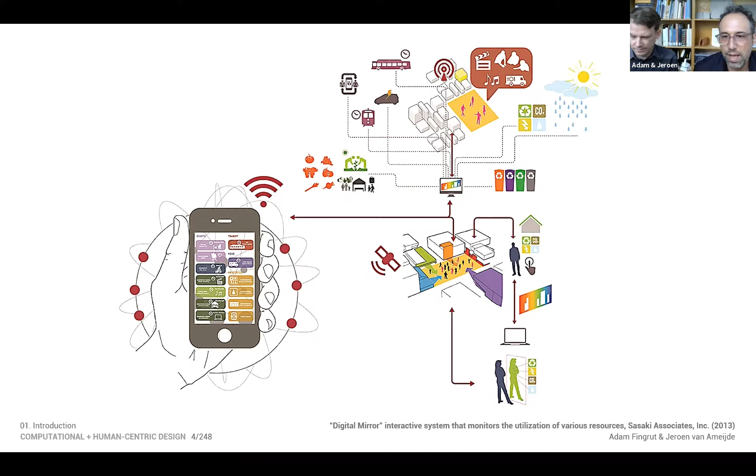Okay. So the evolution of cellular phones since the 1970s shows how new technologies have often had the capacity to not just upgrade existing processes, but to revolutionize many aspects of our daily lives. We now have multifunctional platforms through which we communicate with the world, engaging with our ever-increasing range of data sources embedded within our environments.

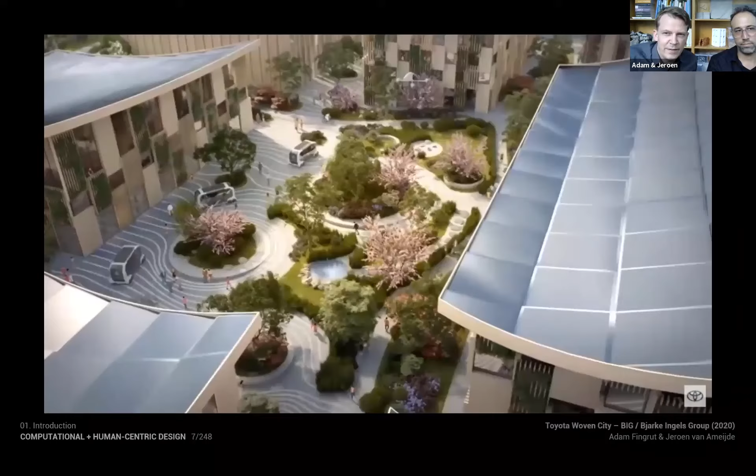These increasingly sophisticated technologies permeating buildings and cities offer exciting new opportunities for us to rethink how we can shape future environments around the living patterns of individuals and communities. Instead of the previous visions of future cities, which were filled with hyper buildings and flying cars, the cities of the future may actually look more familiar, but in reality are also more radical than what science fiction had predicted, seamlessly merging our physical and digital environments through the embedding of digital and robotic devices in and around the home, enhancing all types of logistics, play, and human interaction.

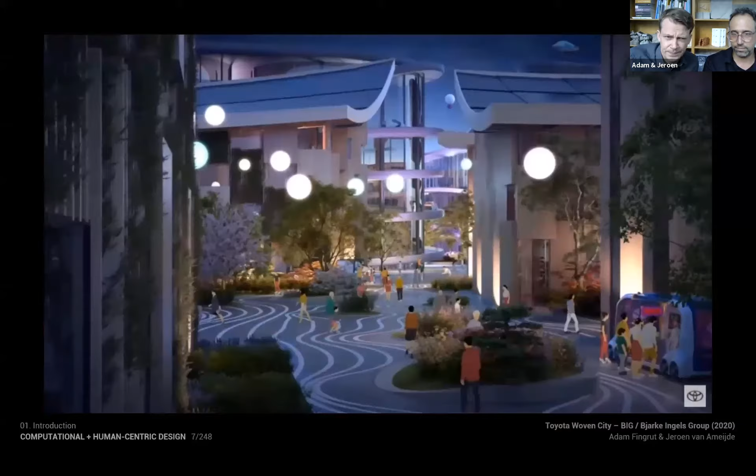Buildings becoming embedded with sensing and actuating systems that respond to individual user requirements in real time, monitoring and analyzing ways to increase efficiency and support productivity in a time when the ways in which we work need to be more flexible than ever.

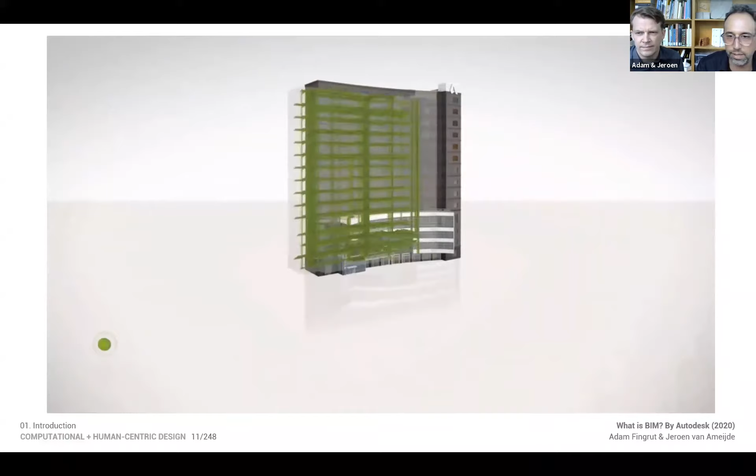So when everything is becoming digital, the role of the architect and urban designer is changing from that of a draftsman of standard solutions to a designer of complex environments that integrate ideas about space, structure, climate, infrastructure, addressing the lifespan and occupancy phase of buildings, and focusing on the design of user processes instead of that of just products.

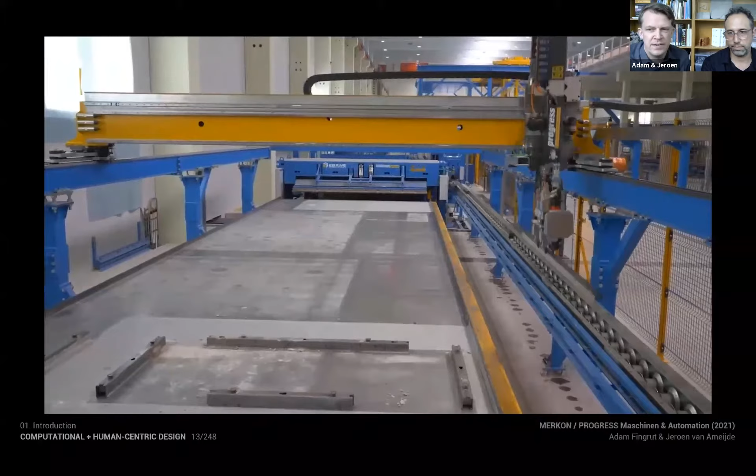New technologies allow us to incorporate a wide range of data, knowledge, and understanding, such as people's perception of space analyzed through computer vision, and allow us to conceive of buildings not as labor-intensive artifacts, but as digitally designed and fabricated kits of parts assembled onto sites using an integrated workflow that seamlessly connects our CAD software to the building information modeling software that controls construction.

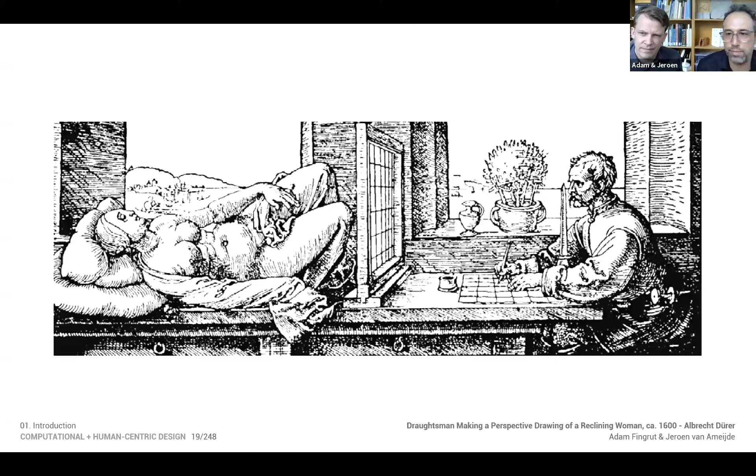Yet as the increasingly sophisticated interface between the digital and physical starts to impact many different aspects of our everyday lives, there is an urgent need to engage with technologies through design thinking, rather than letting developments be driven by engineers, managers, and corporations. Academics and designers are in a unique position to evaluate the tools and methods with which they perceive the world and how they organize and process information, and assess the interface between the analog and the digital world as the most critical aspect, as the feedback loops between the two are the current forefront of innovation.

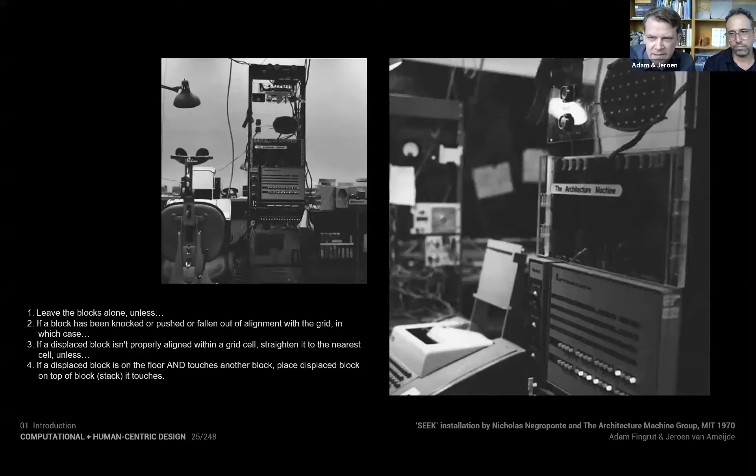Through simple rules that analyze and manipulate the blocks, the system tries to help the inhabitants achieve their ideal 3D environment. And the role of the architect is not to design a fixed outcome, but a process that governs a system of human-centric design. The steps of this system are highly relevant still today, as the scanning and analysis of sites, interpretation and implementation of design interventions are at the basis of all new forms of data-driven design.

Of key importance is the feedback loop between the evaluation of performance and the improvements of future design solutions. As these types of feedback loops are now applied to analysis of complex and big data, we can tap into the real complexities of urban ecologies. Instead of relying solely on the human designer, processes can be enhanced with digital knowledge systems that incorporate the real world needs of end users into designs for the built environment that are better fit for purpose.

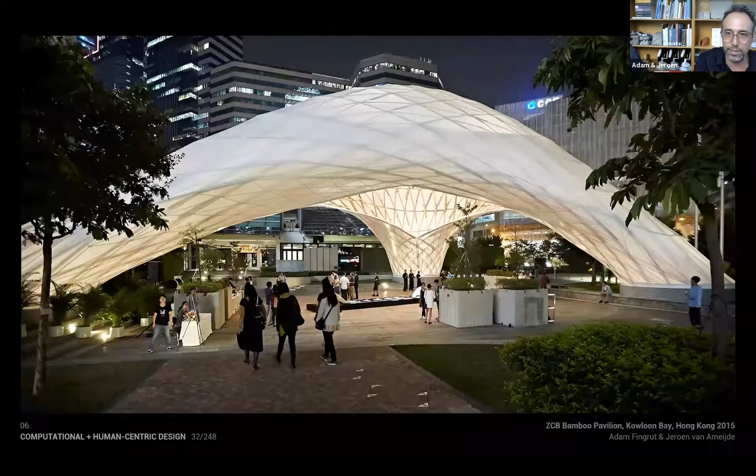My name is Fingrut, and I'm an assistant professor here at CUHK School of Architecture. My background is in computation and design. In particular, I have focused on design complexity approaches to execute mass variation in the built environment, executing construction and material efficiency. I'm co-director of the Center for Robotics in Construction and Architecture, a collaborative research center under T Stone Robotics

Institute here at CUHK, where we conduct collaborative research on mechanical automation and architecture, linking material science, engineering, computational architecture, design, and construction. Also focusing on educating the public through demonstration projects. And we link our research with industry through the development and execution of real-world construction projects. And I'm also involved in the education of computation and automation with our UG and PG students, linking innovative technology with pedagogy and approaches toward design thinking.

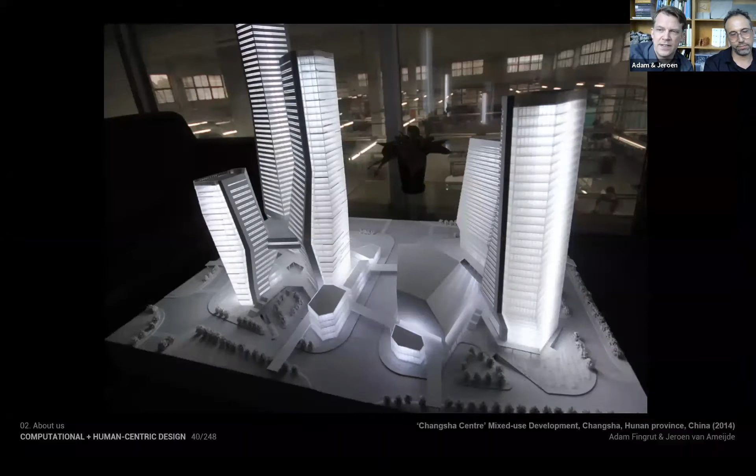Yes, and hello everyone. My name is Jeroen van Ameijde. I'm a new assistant professor since 2.5 years here in CUHK, previously working and living in London. My background is in both academia and practice, teaching part-time and working on projects of various scales since 2002. I've always been interested in the overlap between architecture and urbanism and how buildings shape public spaces and connectivity within their context.

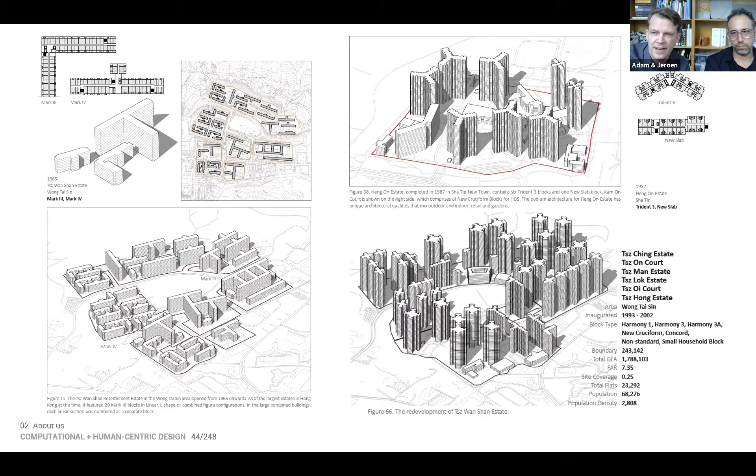And my background also is in designing master plans, which has specifically focused my attention to the design of underlying organizational structures, and how the growth and development of urban areas can be guided by new processes of generative design, and how through the design of, for instance, projects of mass housing, we can develop digital tools that manage non-standard configurations in an affordable way. This has fueled my interest in the standard and non-standard as being used in Hong Kong's public housing and how estate layouts balance between density and livability.

And my current research uses computational analysis of in-between spaces in public housing, which combined with the analysis of people's daily activity patterns, can hopefully lead to evidence-based design guidelines for estate layouts to better support social capital and the sense of community.

So last month, we had the honor to host here at CUHK the 26th International Conference of the Association for Computer-Aided Architectural Design Research in Asia, or CAADRIA. Themed Projections, we invited speakers, roundtable participants, and paper submissions, which would reflect on the different ways in which innovation can impact the quality of future built environments.

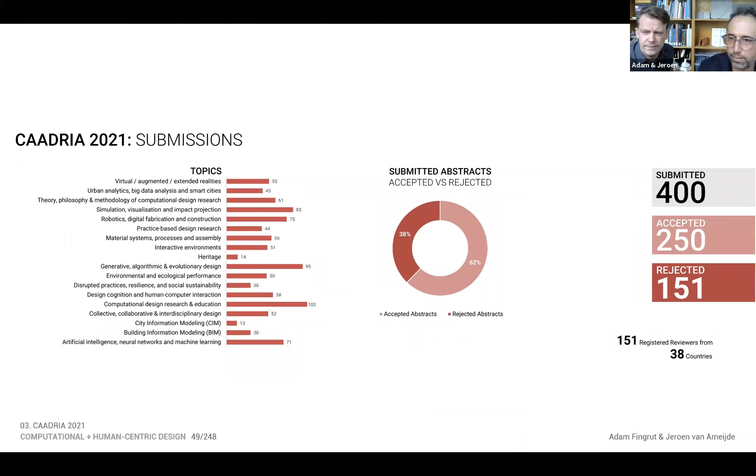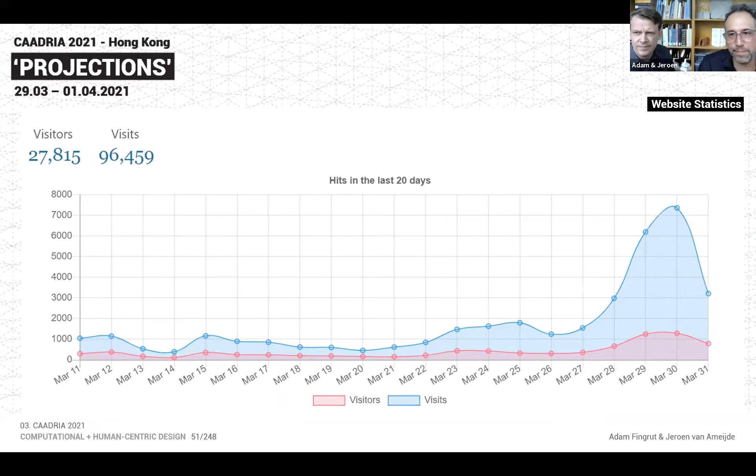The conference annually attracts a large number of papers from all the major universities across Asia and the Pacific region. And since conferences and webinars are now held online, also from many other parts of the world. The CAADRIA website had over 96,000 visits from nearly 28,000 unique visitors. The proceedings, for which we were both editors, include 148 papers on topics ranging from innovative construction to urban analytics, published in 2 volumes of 700 pages each and indexed online.

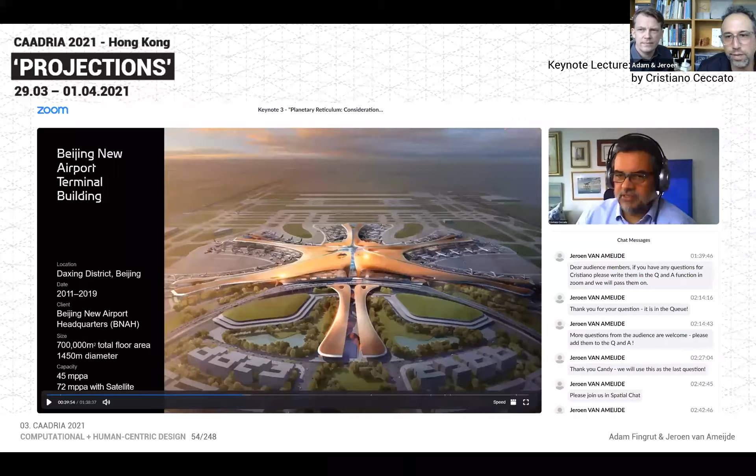Our keynotes and roundtables highlighted the design opportunities and efficiency gains from fully digital workflows, integrating collaborative work from multiple disciplines and stakeholders, with engineering industry specialists noting a shift towards information management services, highlighting the need for international standards for the exchange of complex data sets.

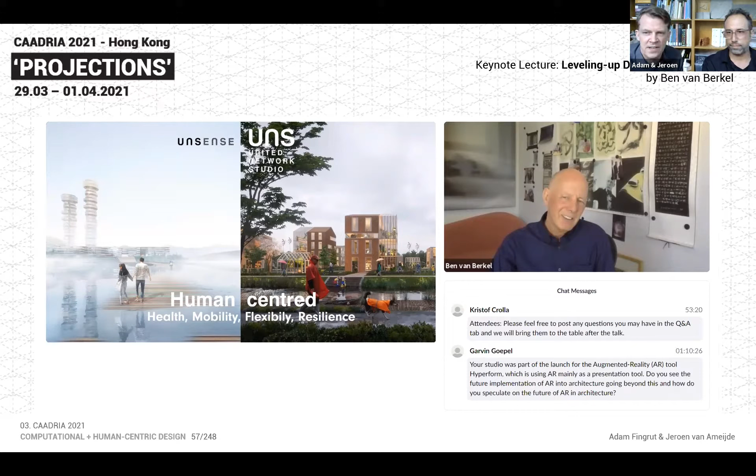And renowned architect Ben van Berkel talked about his new subsidiary company, UNSense, which focuses on artificial intelligence and digital sensor technologies to create human-centric buildings and cities. Several architects, academics, and industry specialists involved in robotics talked about a paradigm shift in the production chain in the housing industry, where a shift from centralized to distributed decision-making could give homeowners more control over the design or adaptation

of their living environments. Professor Carlo Ratti from MIT showed the opportunities that emerge around scanning cities from roads or canals, collecting environmental data to inform policy decisions.

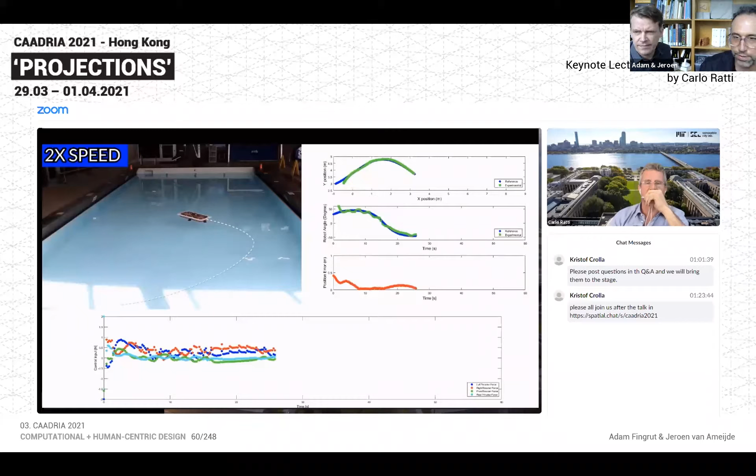As our international panel of urbanists agrees that an urgent rethinking of city planning is needed in relation to a deeper understanding of regional and global ecosystems, which was reinforced by architect and filmmaker Liam Young, who showed a speculative future city for 10 billion people, exploring hyperdensity as the only feasible scenario to balance urban development with planetary health.

For people interested in this research, all the lectures as well as 30 parallel paper sessions will be available online soon. And already now, all the papers with their abstracts, full paper PDF, and 10-minute presentation videos can be accessed on this website.

Okay. In Hong Kong and internationally, the scope of construction projects continues to rapidly grow, creating a shortage of skilled workers to support demand. For example, in 2013, over half of registered construction workers in Hong Kong were over the age of 50. In 2018, the Hong Kong Development Bureau created Construction 2.0 that responded to this need, along with a major upgrade to the industry cross-section.

Under this new agenda, 3 key priorities for quantitative performance improvements were advanced: innovation, professionalism, and revitalization. The Hong Kong Construction Industry Council followed suit with a more detailed breakdown of local industry development, listing building information modeling, BIM as it's known, safety, modular integrated construction, construction productivity, and sustainability.

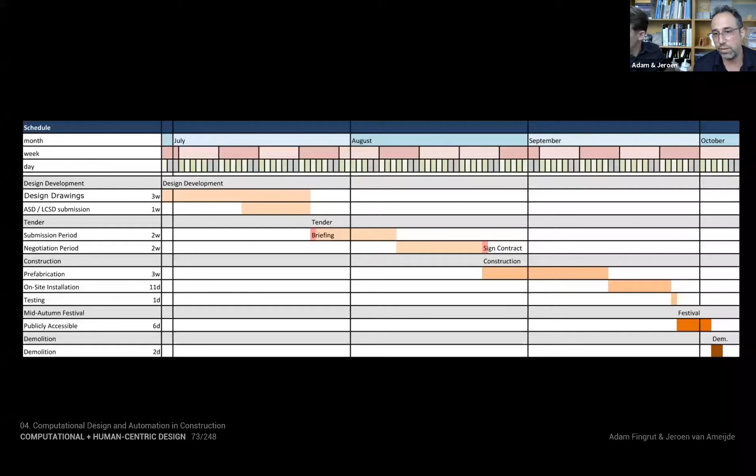After all the conceptual work, this became a real question for the project: how to accomplish geometric complexity, variety, and visual interest in the built environment with low-skilled labor in lightning fast speed. By using the power of mathematics, computation, and digital tools at our disposal, we're able to rethink the geometry and overlay a complex grid atop a generic structural system.

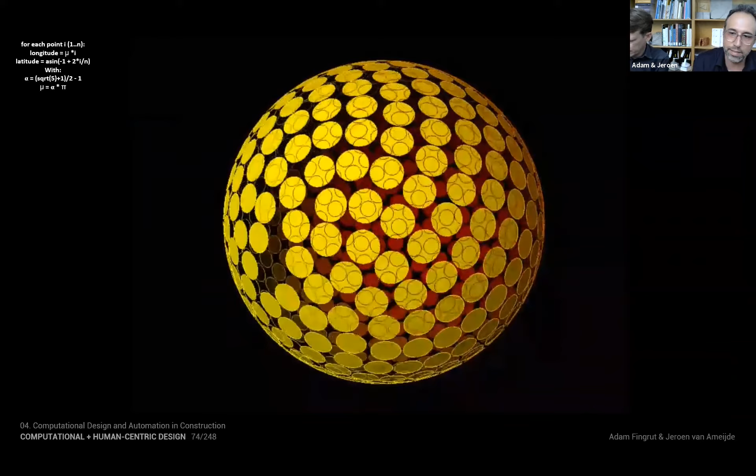Here we're using a method called circle packing, which can calculate the optimum spacing and radius of an area on any given surface. It allowed us to populate our dome in a more complex and dynamic way. The assembly concept was straightforward.

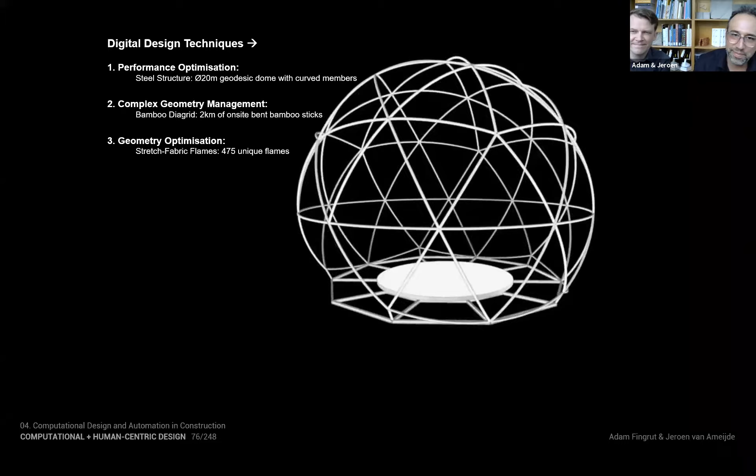Install a heavy steel and concrete base, add a prefabricated dome here, wrap it with bamboo, and finally decorate with 475 unique flames.

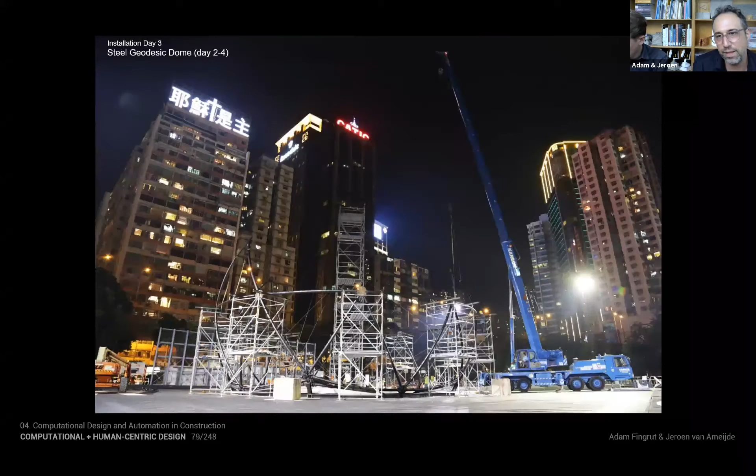Okay. For this to work, notation is everything. It's the conduit between data models and the physical output. And here you see the dome being raised. And bamboo materials were measured and notated based on their intersection points along the sphere, making assembly on the structure straightforward without conventional drawings. And the bamboo diagrid forming over the structure.

And a flexible system using stretch fabric and bamboo was used for each flame or light diffuser. Here we see the first diffusers and LED lights getting installed. Some images of the final construction.

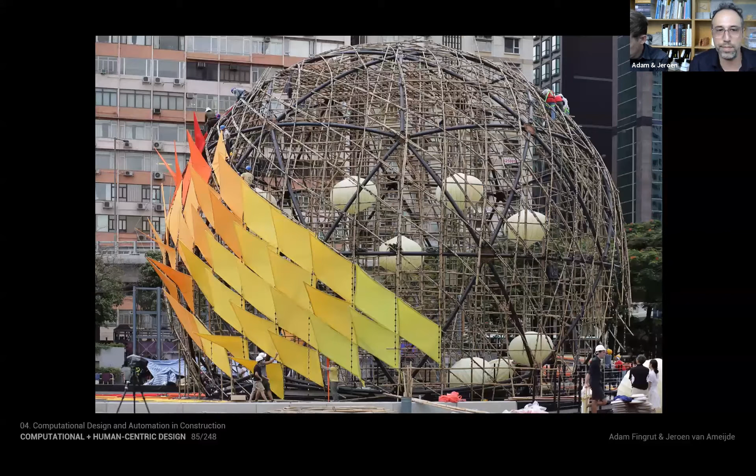And the ZCB Bamboo Pavilion is a 30-meter spanning, lightweight, and bending active grid shell completed in Hong Kong in September 2015 as a public event space. It's built from unprocessed bamboo poles, hand-tied together according to traditional Cantonese bamboo scaffolding craftsmanship, and covered with tensile fabric.

The project is very much a case study for the computational design and building information modeling of structures where both applied materials and available craftsmanship are highly unpredictable in terms of accuracy and precision. It was our goal to narrow that relationship for an accurate outcome.

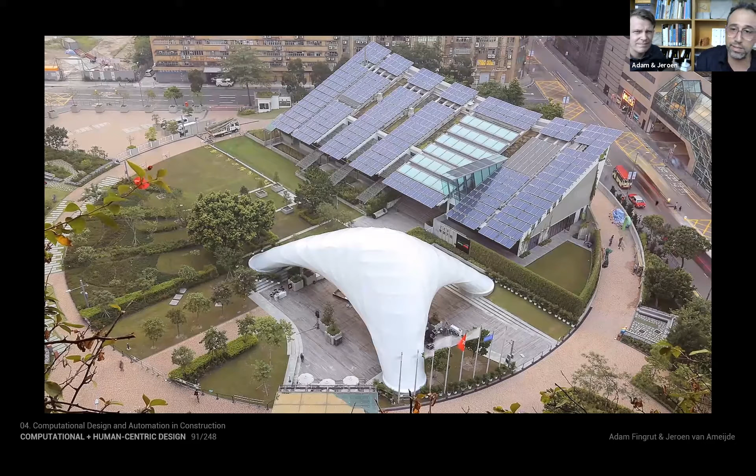You can see how it compares in size to traditional bamboo temporary structures. It uses considerably less material as it capitalizes on the bending strength of the material. The project site in Kowloon Bay near the Mega Box. Extensive use of physical and digital models were needed in a variety of different scales.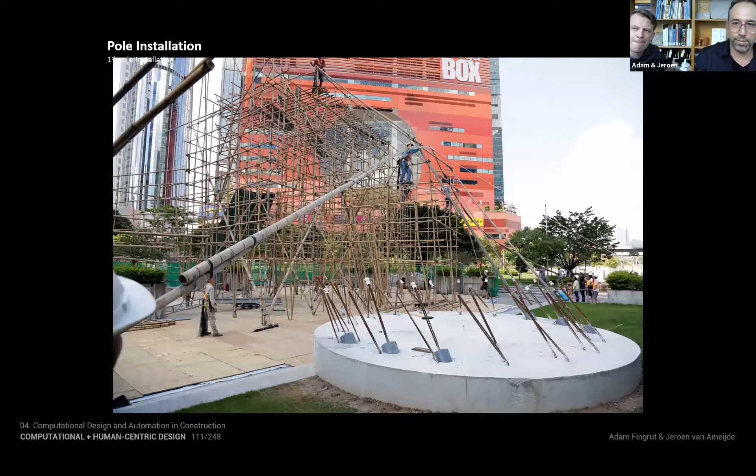And this exact set of drawings was used to lay out bamboo poles on a giant 50-meter long table. And the material was measured according to what was notated, and the cross-connection points were marked off later for reference during assembly. Here you can see the very first pole being installed into place with temporary scaffolding in the background, and fixing to the concrete plinth and footings.

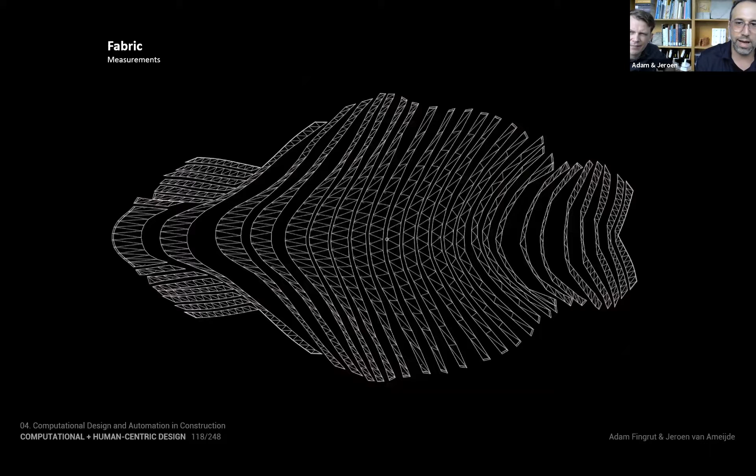910 square meters of fabric were also applied. And workers measured the as-built structure and entered the length data into mobile phones using spreadsheet applications, resulting in unfolded drawings like this that could accurately be applied to the as-built structure. Material was then cut and fabricated in a factory setting using robotic cutters, and heat welded into place based on those digital drawings.

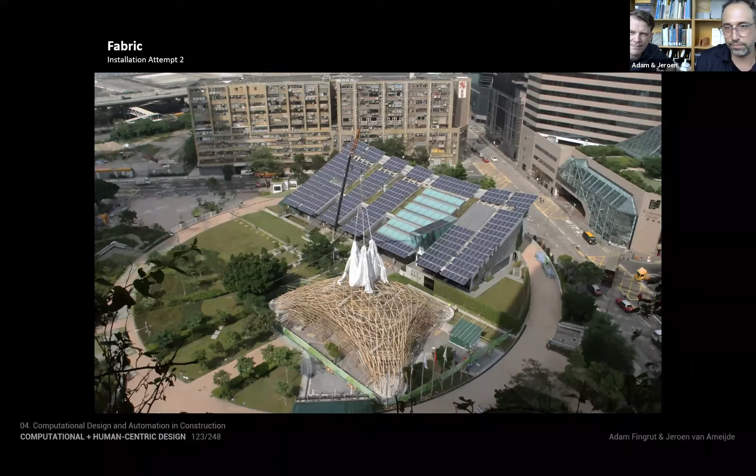Material was then hoisted into place and fastened to the structure in one super tailored surface, and some images of the final result. And of course, we're able to 3D laser scan the entire structure and test for final deviation from design, computer model, and as-built construction.

And a little bit about robotics and what I do with CUHK. This research discusses the assembly of brick structures with a cable-driven parallel robot, explores the impact of computational design tools and the deployment of robotic equipment for the creation of an expanded architectural design space based on the limits of material and equipment in place of a skilled labor force. Bricks and bricklaying have been a part of architecture and our built environment for centuries. And the industry relies on intensive specialist on-site labor.

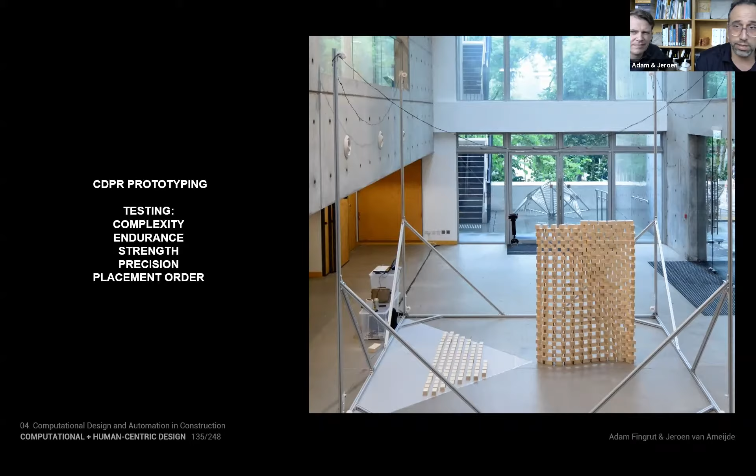Other research has explored the use of long arms, but they're quite heavy or have limited mobility. Our research in the use of cable-driven robotics are lightweight systems that can span over large distances. The setup allows the gripper to reach a large three-dimensional working area in which bricks can be accurately placed. Using input parameters such as guide curves and brick dimensions, brick coordinate information is generated for further processing. So if you think back to our notation, now it's really just a spreadsheet of data transferred to a robotic arm. And geometrically complex spatial structures are possible with undulating walls.

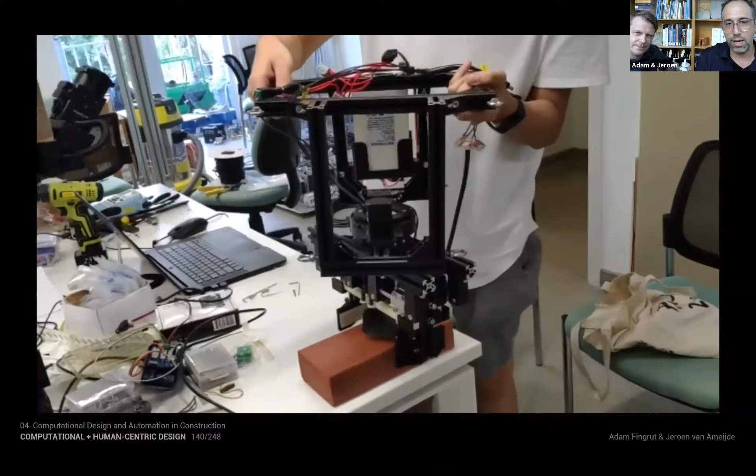This research has been displayed in a variety of industry events, workshops, and museums. And over the years, the system has undergone a number of significant upgrades and advancements in strength, accuracy, and endurance. Automated placement order, stronger gripper motors, stronger cable system, increased precision. On the design programming side, we add intelligent placement order for more stable structures.

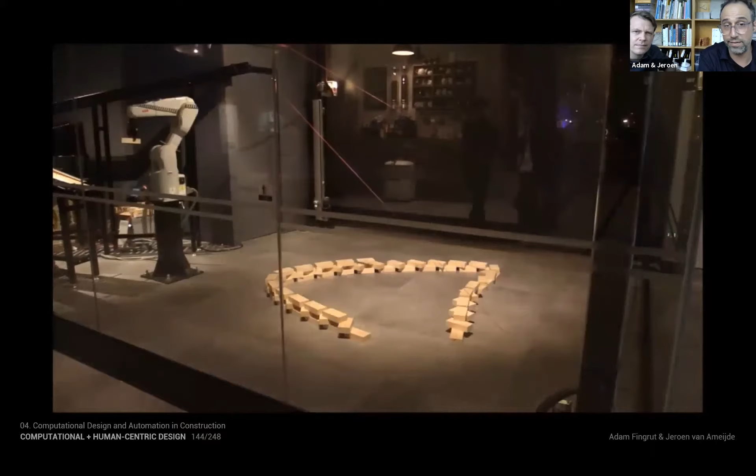We currently have an updated version of the system on display at the Hong Kong Science Museum in TST as part of their exhibition on robotics. This particular system was designed to be on a continuous loop, and we're using lightweight wood for bricks. So here you can see the gripper placing a small, relatively safe structure for display purposes. And I think it's been running for over 3 months or so, with not too many hitches.

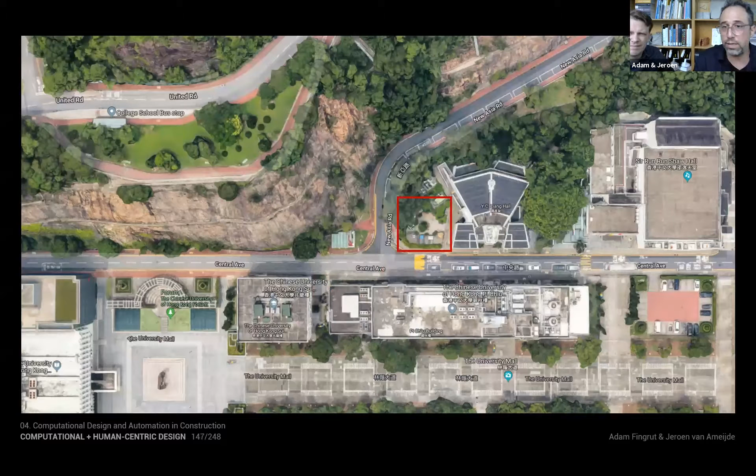And finally, the Yard of Environmental Sustainability project is part of the CUHK Recycling and Sustainable Campus Initiative. This structure, set to be completed this summer, will house a recycling depot for staff and students. The project is also a new space for students and staff to visit and relax, located along the central avenue of our main campus. Here you can see a laser scan of the site with previous designs for recycling bins, clothing, electronics. The space will also include recycling for PVC banners, a free library, etc.

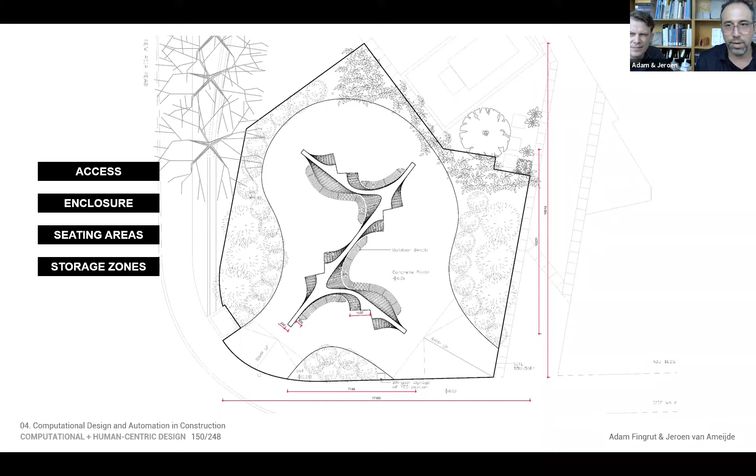The design intends to include accessibility standards, shaded areas, seating. And the project advances our research by placing it into a full-blown construction project with stakeholders, engineers, architects, landscape architects, contractors, building department, and of course, a generous client. And we are on site now, and we are in the final stages of testing before we kick off our final construction.

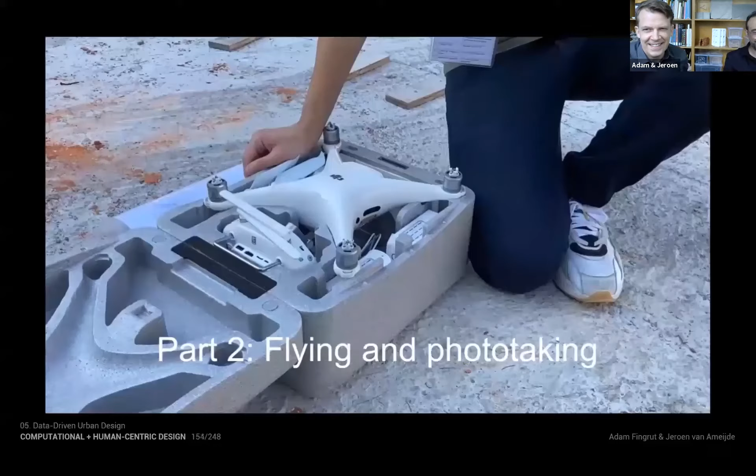Yeah, so Adam and myself have been working on slightly overlapping projects as we have been awarded separate and joint grants by the Hong Kong Construction Innovation Technology Fund, CITF, and the CUHK Teaching Development Grant Program, TDLEG. In this CITF supported research shown in this video, sorry, it was not playing.

We explore the use of drone scanning in the conceptual design stage rather than using this for quality control during construction phases as is often used in industry. The idea is that the highly detailed and accurate site surveys can plug into a more informed and data-driven design process, which is normally based around simplified understanding of the context.

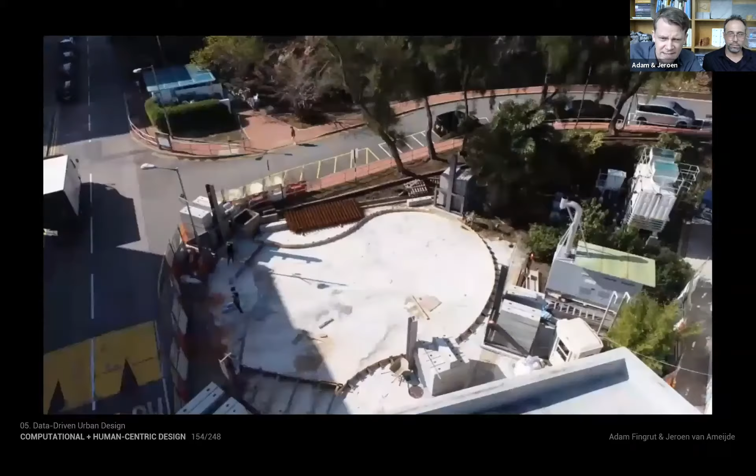Images captured by the drone are transformed into a 3D mesh in the modeling software commonly used by professionals and students in architecture and urban design. This process can be done in stages, even taking photos on foot and adding more detail where needed.

Details such as building alterations, greenery, public space, materiality can be captured and inform a georeferenced and accurately calibrated 3D model, which can be used, for instance, for solar energy analysis to help understand which areas in the public space may be cooler in the summer in relation to the urban form.

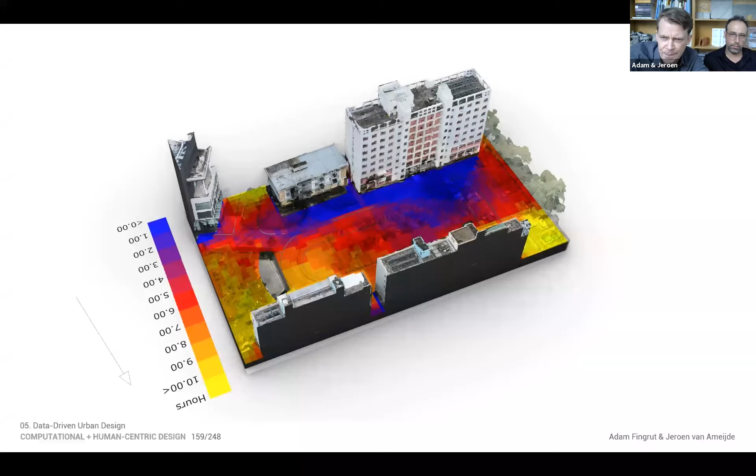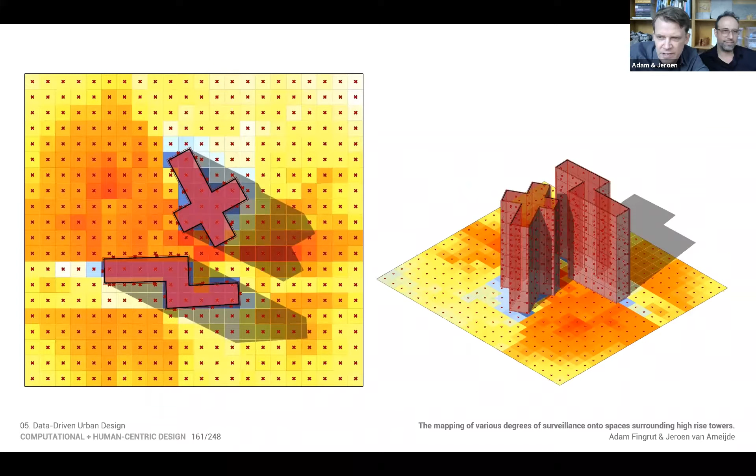We can also perform visibility studies based on the principle of convexity, the blocking of line of sight, which increases the sense of privacy, but may also decrease the sense of safety and orientation in public space. And recent improvements in software and hardware computing now allow these studies to be done in 3 dimensions, visualizing different degrees of surveillance, or what Jane Jacobs famously called eyes on the street.

So in a small test site on the CUHK campus, we can see where the most public spots are and speculate on placing new landscape elements that mediate privacy. And use the same photogrammetry model to do quick testing and visualization of design alternatives in the conceptual stage.

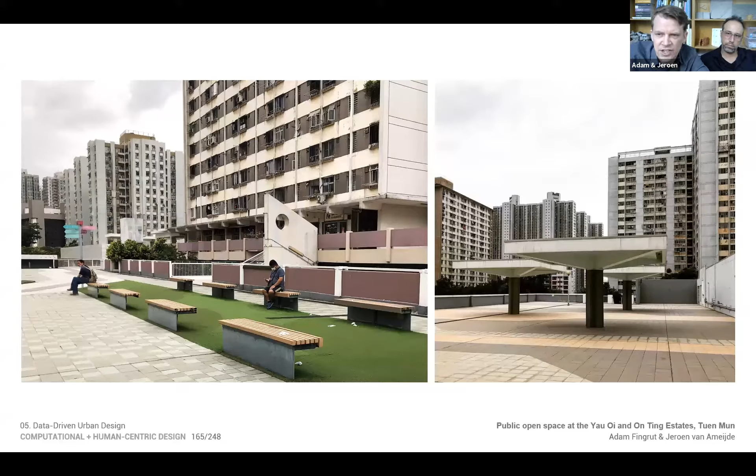A similar but more small scale and more detailed project is currently being developed in collaboration with various stakeholders at the Yau Oi public housing estate in Tuen Mun, where an existing public space is lacking shaded seating. So here we've done an overall site analysis of climate comfort and also various levels of seeing and being seen, identifying the spaces which have the most potential to improve social interaction between elderly residents of the neighboring estates.

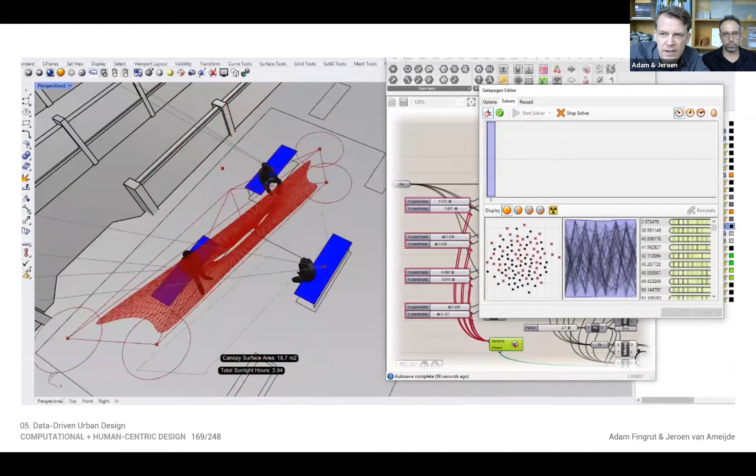In this, what we call digital placemaking process, a canopy form is generated to maximize the shadow on existing 3 benches here, while also minimizing the use of materials. The project uses the principle of lightweight structures using a tension fabric, where the curvature helps to stabilize the canopy against the wind load scenarios.

And you see an optimization process using genetic algorithms that automatically fine-tunes towards an optimized result, where you see the final solution being stabilized in the computer. The software automatically evaluates all design alternatives through a solar analysis and helps select a form that also improves privacy and stimulates conversation between different people through the principle of triangulation, as William Whyte has called this.

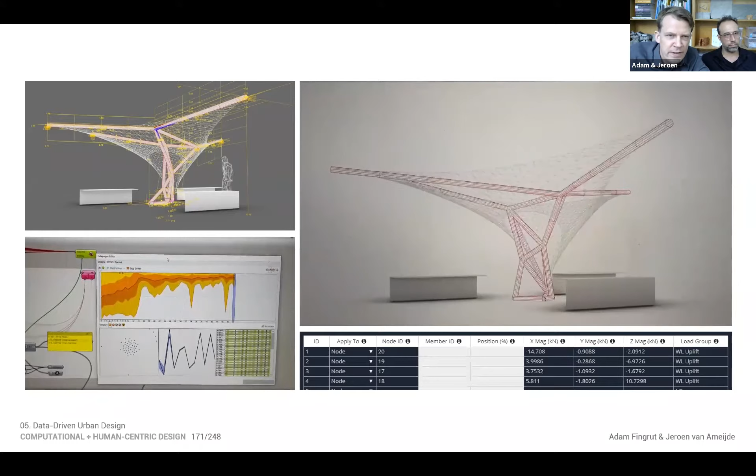Currently being developed is a structural design adapted to the fabric rather than the other way around, optimizing a minimum amount of steel for a central frame, so that the project can be further developed with the help of fabricators who donate their expertise and time as part of this research project, as we're getting ready to install the first canopy on site in the coming months.

The next project explores the linking of research and design at a larger scale, testing speculative redevelopment scenarios for Nam Shan Estate near Shek Kip Mei. This is a final year dissertation project by a student questioning why in Hong Kong we have such limited available public space, but also still many underused areas and facilities.

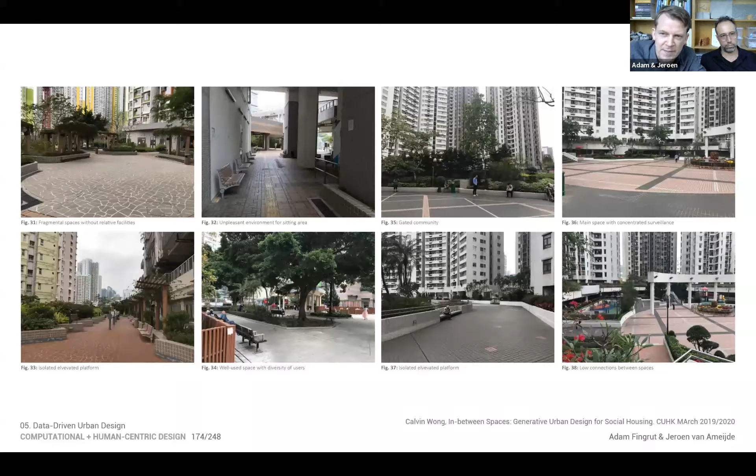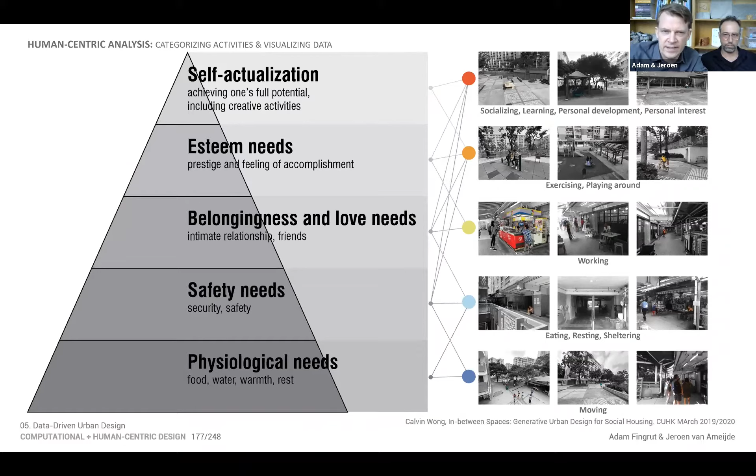He did extensive mapping with a team of colleague students to document various activities taking place and analyzing spaces with higher degrees of social interaction, categorizing these activities according to Maslow's hierarchy of needs pyramid, so that we may understand which public spaces can support physical, social needs, and also support personal development and self-actualization.

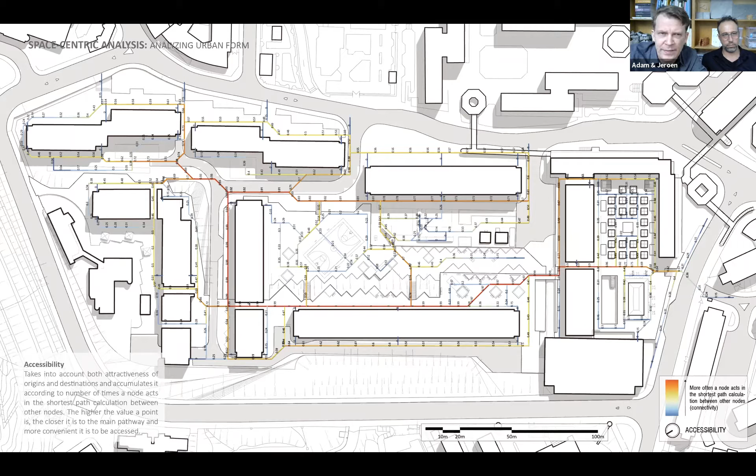This research combined different morphological analysis, such as surveillance again, but also accessibility, in this case based on space syntax methodologies of network integration, to classify the different spaces across the estate according to their social and physical characteristics.

And allow for this kind of combined correlation mapping to understand why certain spaces are well used and other spaces are underused, and what the reasons for this may be.

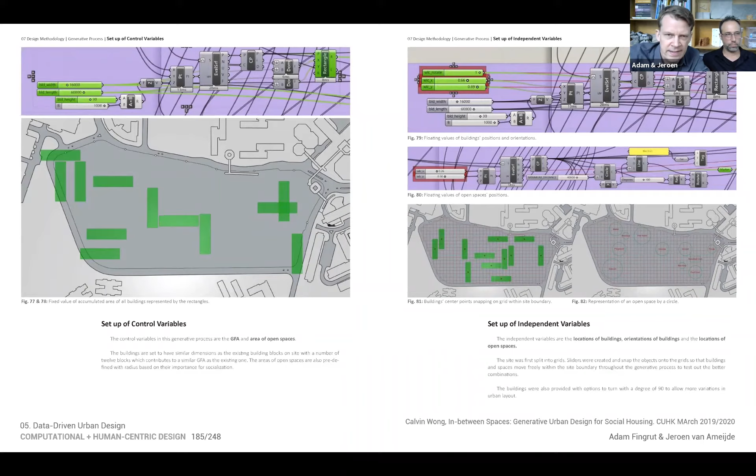In a final stage of speculative design, the student tested a generative system for changing the building massing as part of a hypothetical redevelopment phase of the estate, based on a list of desired spaces and relationships between them, which was found in the field studies and the analysis of those findings. He developed several testing scenarios of new buildings. One of these shown here has double the building density, but still results in a central open area, which could serve as a flexible community space.

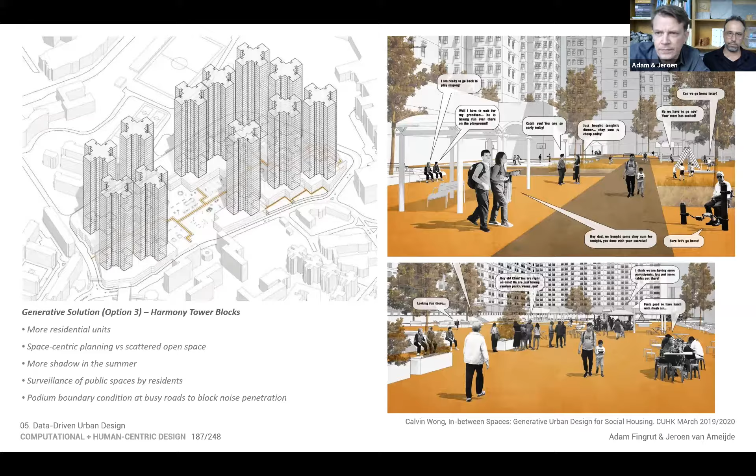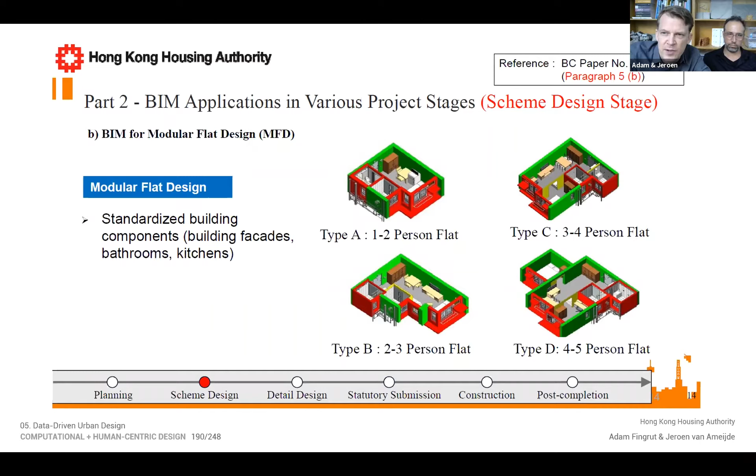So in our work, we referenced a lot the methodologies already in use by the Housing Authority, for instance, for the planning of improved microclimates, and also their advanced design and construction methods using different types of precast concrete elements. But we also find that the modular flat design currently in use has quite a limited catalog of options, especially in terms of the variation of spatial depth and hierarchy of the internal floor plan, which creates a lack of freedom for residents to choose how to engage with others in their household.

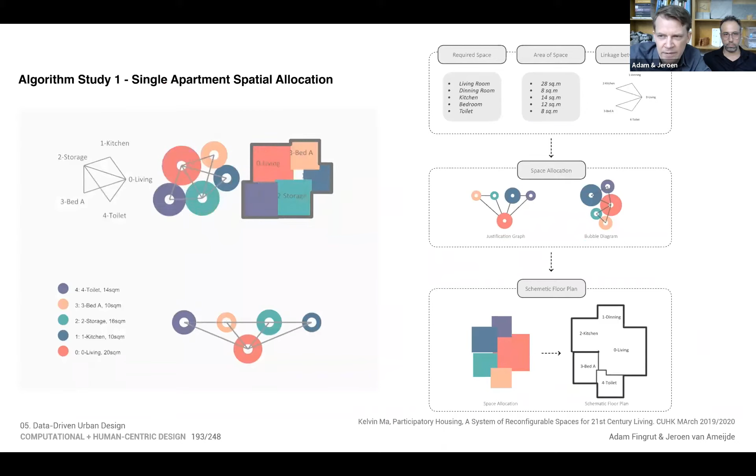While the forced social engagement might be good for some types of nuclear family, it may be limiting for new forms of co-living or live-work arrangements, which are increasing due to changes in society, for instance, especially recently during the COVID pandemic. So this research explores how to incorporate more diverse user requirements into floor plan arrangements at the scale of a single apartment, and also at the scale of a combined floor plate where several customized apartments need to negotiate around access to the lift core, daylight, and ventilation at the facade perimeter.

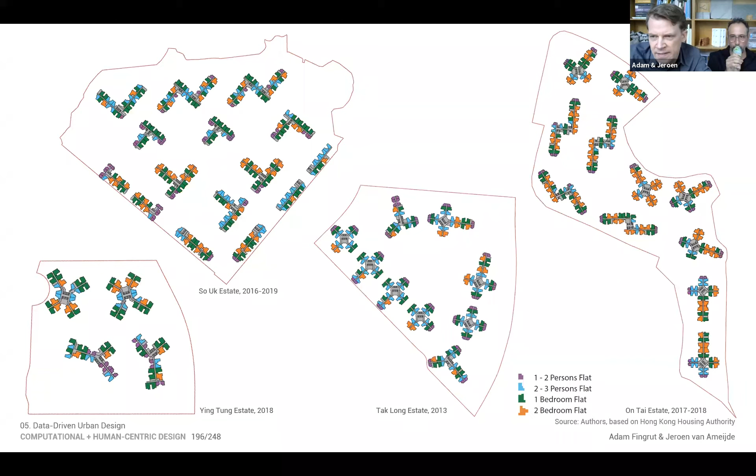So we speculate how this approach could further liberate the current approach that is called non-standard housing, which has already resulted in more site-specific and environmentally sensitive estate layout designs, but in reality has an apartment mix which is still based on models of repetition.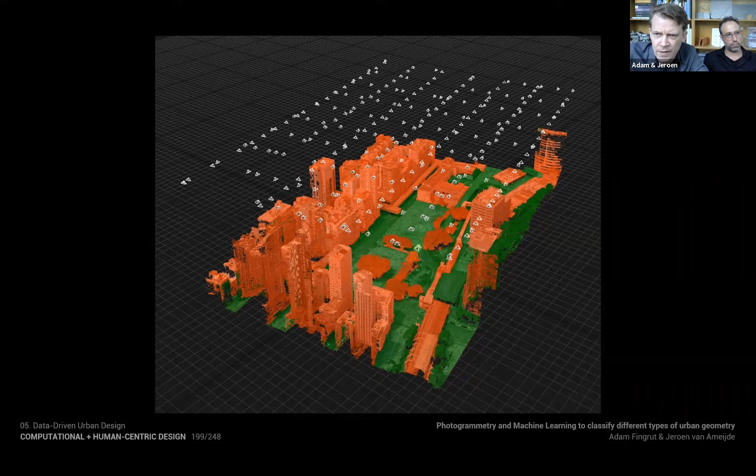So in our most recent work, we look at combining aerial surveillance with other types of urban data to test a generative urban design process informed by site and context. So besides the photogrammetry and machine learning algorithms that we now can use to process this scanning data and classify different geometry groups, we can also use open source GIS data to collect, for instance, locations of points of interest on surrounding sites, and combine that with user density and popularity data sourced, for instance, from Google Maps.

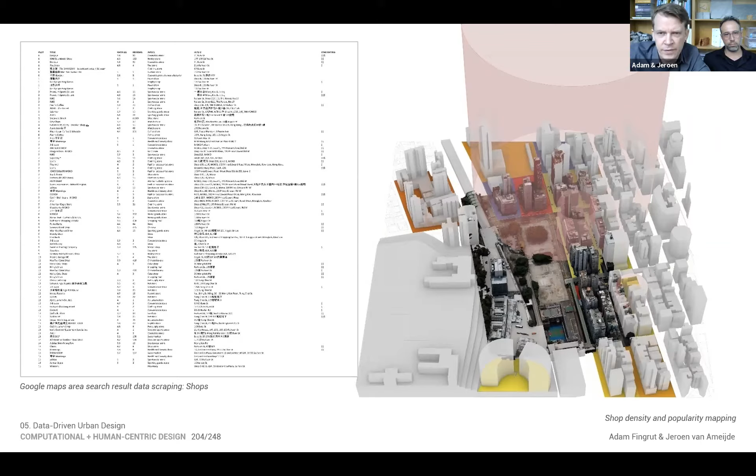So we can map shop and restaurant locations, and also the ratings and reviews from users to build up a comprehensive map of attraction points and potential visitor flows through the neighborhood. Incorporating all this in massing studies, we can test not only the density of urban fabric, but also where we leave empty spaces for the flow of public and activities in relation to the surrounding context and urban fabric.

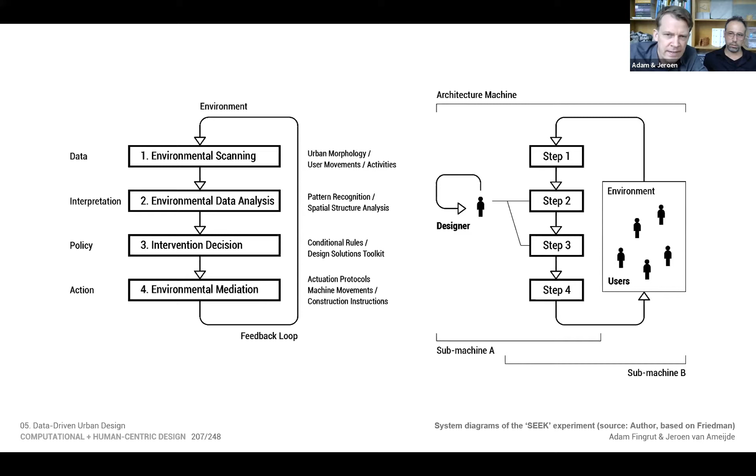So in my longer term research, we are trying to reinterpret Negroponte's architecture machine concept into a workflow that would enable participatory design in public housing estate open spaces. This is a current case study project we're also working on, Prosperous Garden Estate in Yau Ma Tei. Originally, we started working on this as part of a competition organized by the Housing Society and the Jockey Club Design Institute for Social Innovation. So we performed a 3D scan of this estate using both drone and terrestrial scanning to create a detailed 3D model documenting the various recreational spaces.

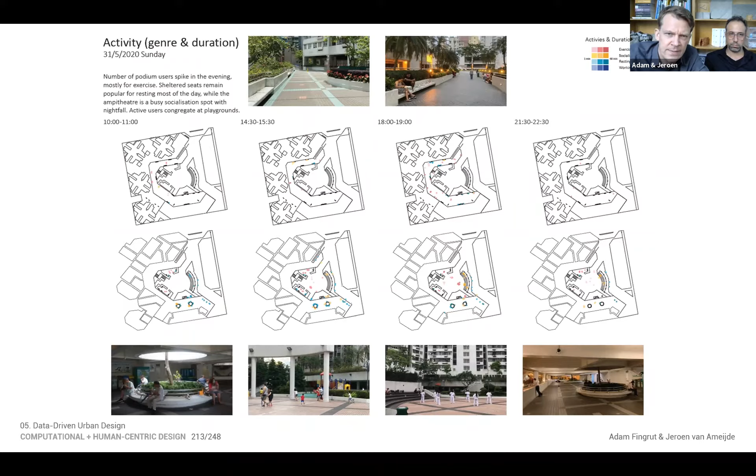And as a second part of the research, we conducted a structured field observation with a team of student helpers to document activity types, locations, and durations across different times of the week and weekend days, to understand different densities of activities and project them into a digital model at the different height levels of the landscape in this estate, which can then be analyzed according to certain distance rules, for instance, based on the proxemic interactions theory by Edward T. Hall, understanding personal and social distance, and therefore translate from a user-centric to a space-centric type of analysis, where we can understand the statistical occurrence of user presence and co-presence as a feature of the various locations.

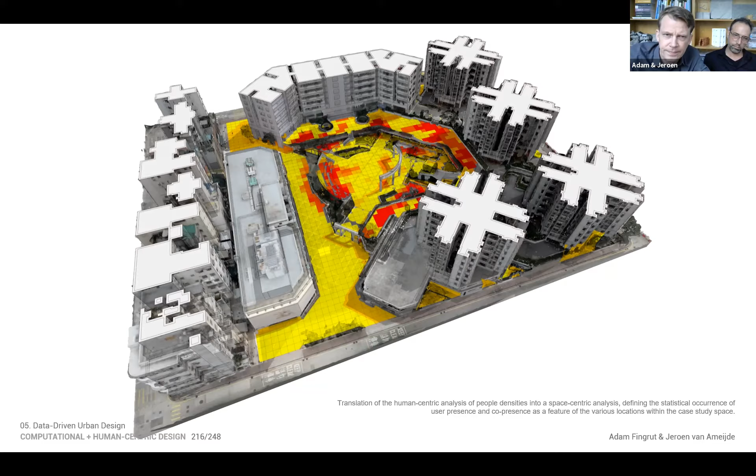Further steps currently in progress are to develop a method which automatically analyzes people movements and activity densities within public space using machine learning algorithms and computer vision. So as most of this work is currently still in progress and hopefully will produce further results in the future, it is guided by the idea in between these two agendas shown here, which is working towards responsive environments in which technology can support a more human-centric approach to urban studies and urban design.

So just in our last section here, when we consider the initial question of this presentation, how can we prepare for and engage with the world that is becoming increasingly digital, we're developing a teaching strategy that combines design thinking and technology. As we refer back to the feedback loop diagram, we can break down this process into individual modules that can be taught separately or combined.

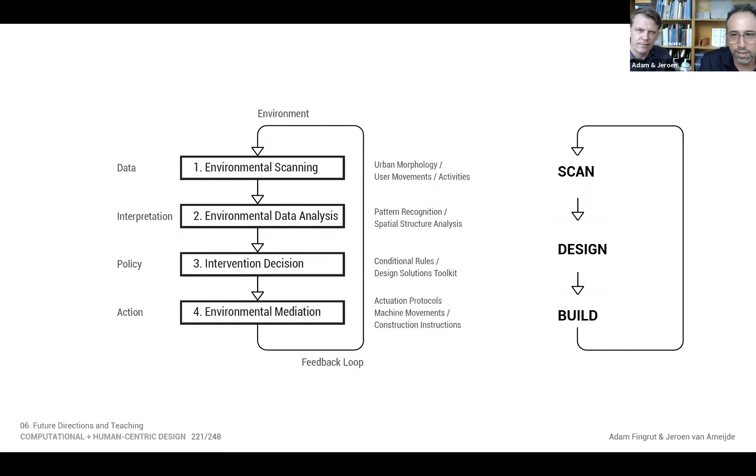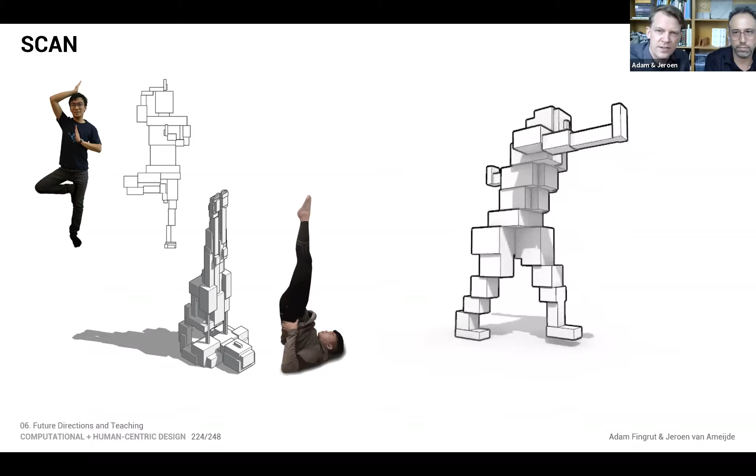Translated into basic architectural terms, we can introduce digital tools and innovative thinking around scan, design, and build. So scan might, for instance, be an exercise for second-year students to analyze an image and use a sampling logic and a generative drawing system to create interpretive patterns. Or it might be a volumetric translation of human figures into an abstract composition of self-similar components, letting students learn basic skills of 3D modeling and composition.

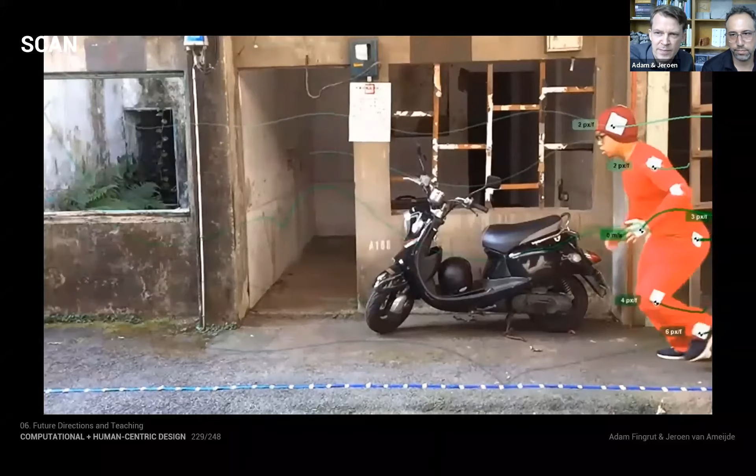Using high-resolution 3D scanners, students can capture intricate details and patterns. They can digitize things from the world they experience to create 3D models suitable for further experimentation, simulation, and analysis. And within intriguing sites, we can process scans that capture movement, helping to understand the movements of the body in relation to specific aspects of the physical or built environment.

And then design thinking can be enhanced through new tools for visualization and communication. We link the collaborative design environment, like our architectural design studios, through virtual reality tools. And as part of a final presentation, reviewers can be given an immersive and interactive experience into three-dimensional space.

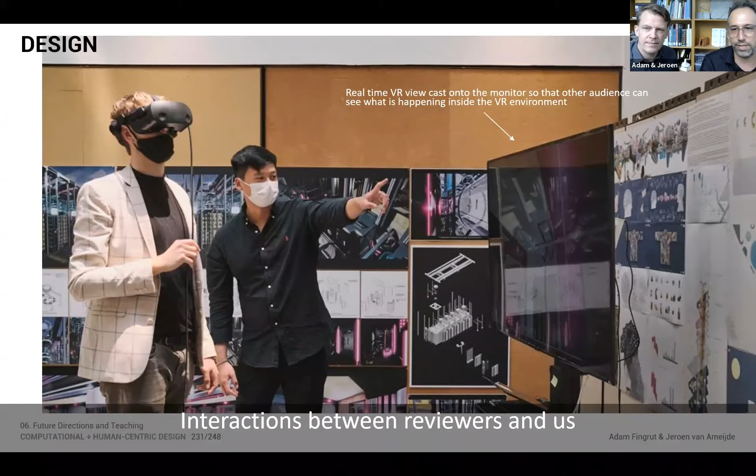Design can be developed based on earlier scanning data using digital analysis to inform and test, for instance, elements that mediate privacy, testing out simple kits of parts systems that can assemble in different densities, responding to a site intervention strategy based on, for instance, diverting circulation and creating new opportunities for social interaction in a place that normally wouldn't let people have those kind of activities.

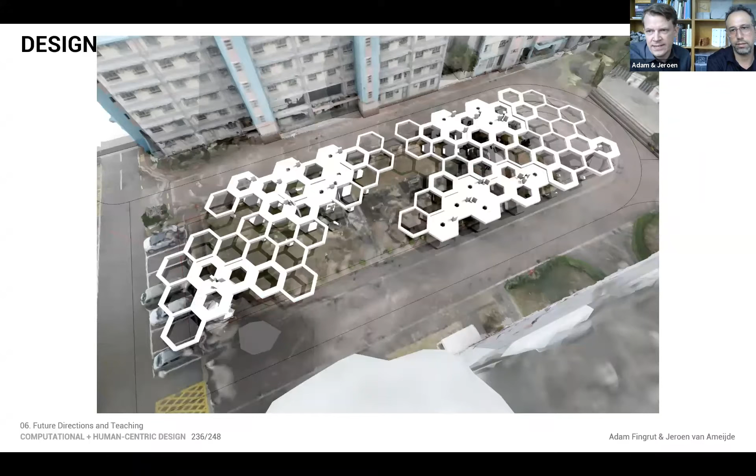And testing and developing a detailed and realistic representation of the context. Understanding not just the buildings as form, but as performative systems in relation to the scale of the human body, and looking at the interior perspective instead of the aerial view.

And another exciting part is we have access to small desktop robotic devices, and we can expose students to the same code being used on those big construction projects, but at a scaled down price and in a scaled down size. We can start to test real world assembly processes and explore creative possibilities around them. Even starting to test out machine vision and artificial intelligence as part of a pick and place workflow.

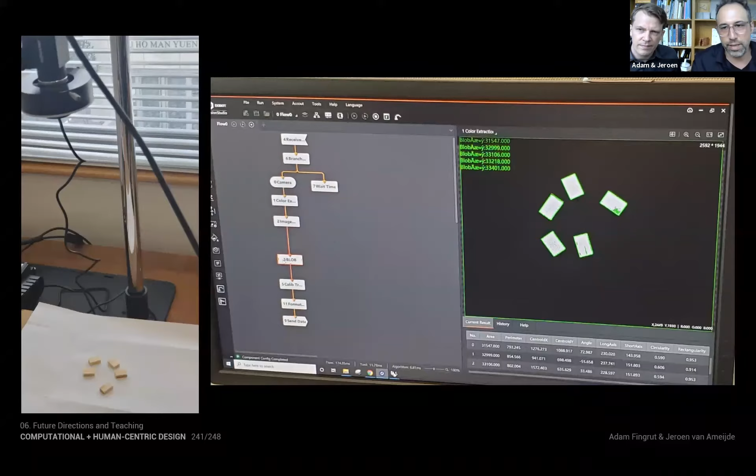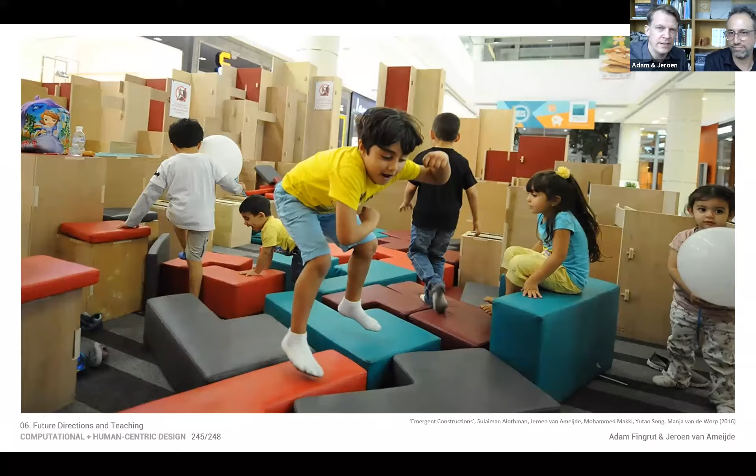This allows us to speculate around augmented construction sites with complex assemblies where the design is in a detailed manner responding to the analysis of social conditions within these existing environments, and then responding with designs that have a high resolution approach to social performance and incorporate the possibility to be endlessly reconfigured based on the ever-changing needs of the inhabitants.

So in conclusion, as we formulate our own version for this webinar, maybe architecture as a computational social science, we developed this around an agenda that moves away from classical mechanisms and reductionism, but instead embraces the notion of ecology, which instead of using static and isolated notions of problem solving, tries to understand the complex interactions between design solutions and people within environments that change over time.

This type of systems thinking, although technical in nature, is first and foremost based on human creativity and curiosity. As without design thinking, we would not be able to imagine and shape the world as we would like it to be. And I think that's it.